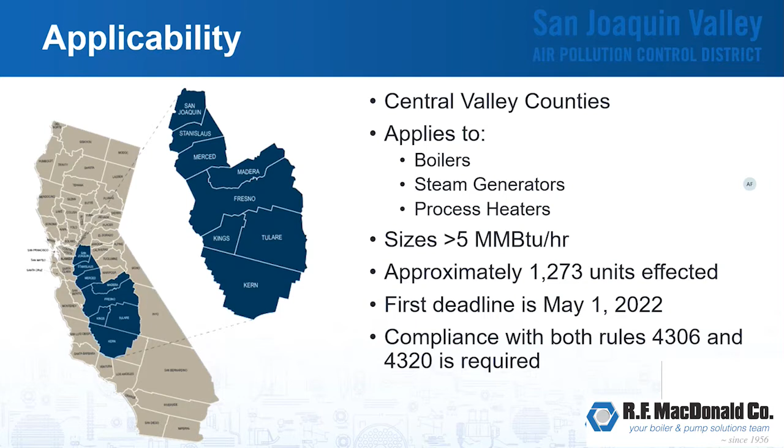Approximately 1,273 units are going to be affected. The first deadline for these rules, which we're going to talk about a number of times through these presentations, is May 1st, 2022. Compliance to both these rules is going to be required, rules 4306 and 4320.

We've got a team of people that'll be able to help navigate through those rules. For what we want to go over: a little review of NOx formation, the two NOx reduction strategies that we touched on previously, and then we'll get into more specifics on our SCR applications and the various ammonia sources we can work with. At the end, we'll have a question and answer if there's anything anybody wants to go over.

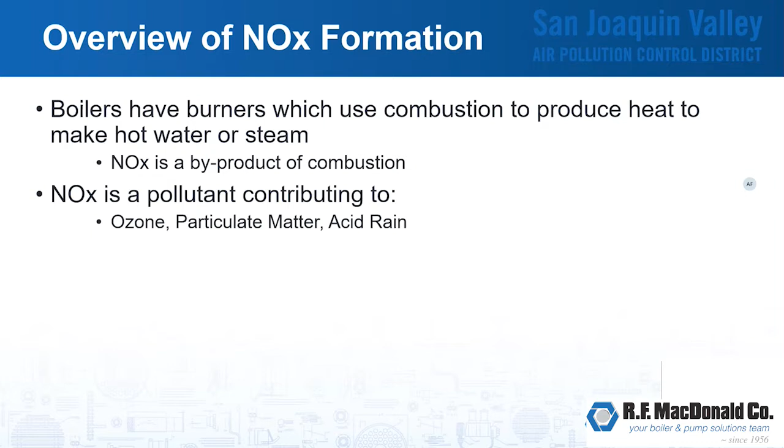Boilers and burners that use combustion to make heat are going to have products of combustion, primarily NOx. NOx is going to be a contributing factor to ozone depletion, particulate matter, and acid rain.

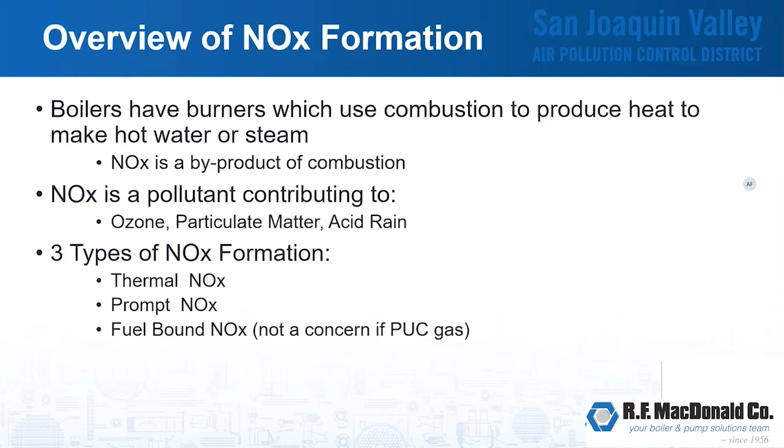The three main sources of NOx formation during the combustion process are thermal NOx, where we're creating NOx in high heat locations, prompt NOx, where we're creating NOx in fuel-rich locations within the flame, and fuel-bound NOx, where our fuel in and of itself carries additional nitrogen to promote the production of NOx.

Thermal NOx is the largest contributor to the overall NOx you're going to see. For ideal combustion, we're taking fuel, mixing free oxygen, free nitrogen that's in the air, and creating CO2, H2O, free nitrogen, and free oxygen, and the resulting is the heat that we use to heat our process.

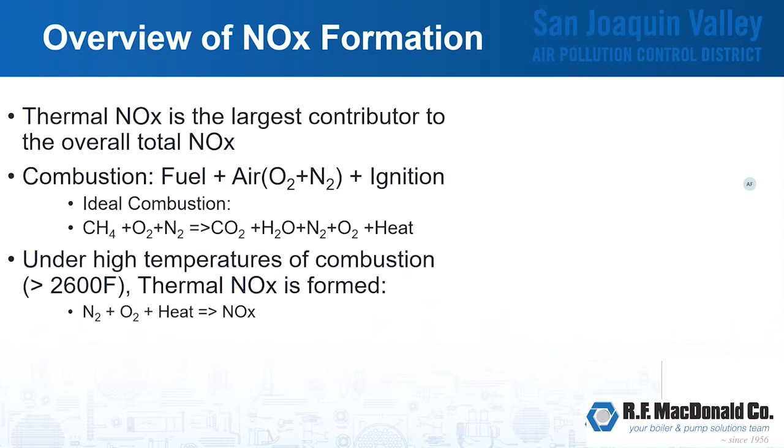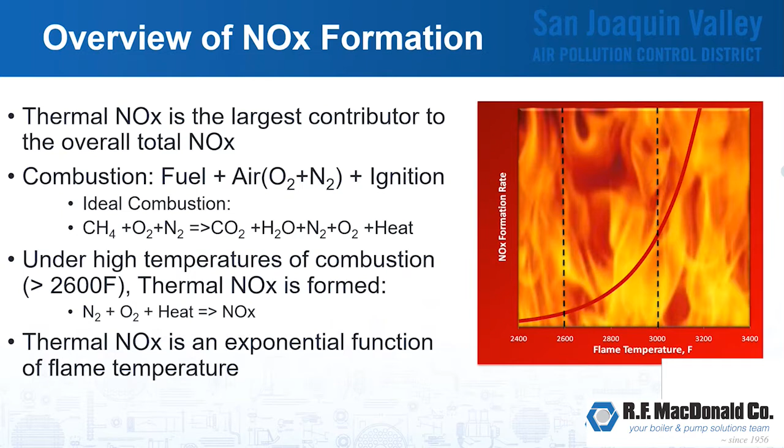Under high temperatures, free nitrogen and oxygen with that heat create NOx. And as we can see here in the chart, as we increase flame temperature, our NOx production is exponential. So the whole idea behind a lot of our burner technology is to keep that temperature down.

So the two strategies that we have: one is burner modifications or new burner. With this technology, we're able to get down to 5 ppm. Typically less expensive than exhaust treatments like SCR. For units smaller than 20 million BTUs, it makes a lot more sense to go with a burner modification or retrofit. One of the downsides to burner technology only is that to get there, we have to increase air, which decreases our efficiencies.

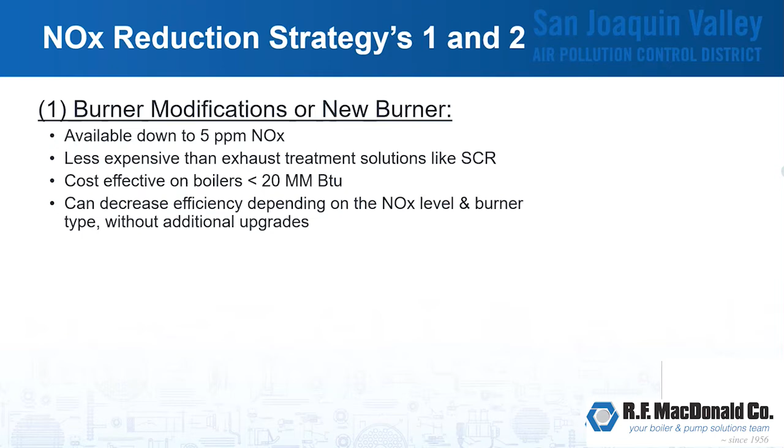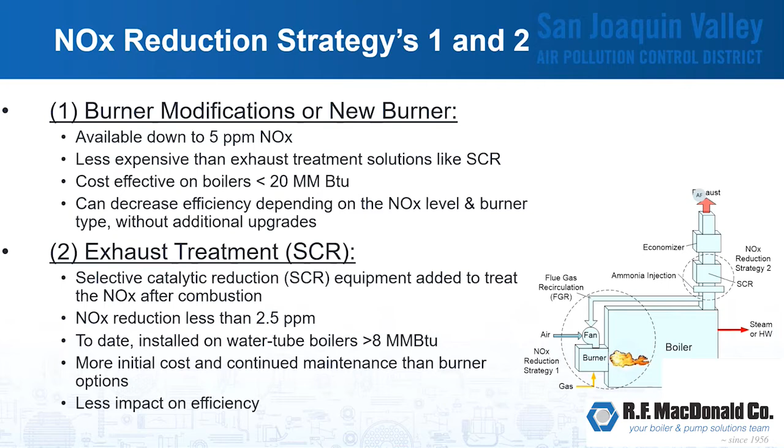The second option that we have is an exhaust treatment on the back end, which is our SCR. Our NOx reductions can get down to 2.5 ppm. To date, we've got them down on the smallest unit of 8 million BTUs due to special fuels that they're firing. Typically on the SCRs, you're going to have more of an initial cost and continued maintenance than you would have on a burner option. But one of the benefits to an SCR is that you're going to have less impact on efficiency.

SCR can be applied to most boilers, steam generators, and process heaters. It's been used for a long time. We've got a history going back to 2006, and it's a proven technology.

With SCR, we can meet air district regulations down to 2.5 ppm using an existing 30 ppm burner. And we can also achieve the lowest required ammonia slip of 5 ppm. There are different areas that may require 10 or 5, but 5 is the lowest that you'll see.

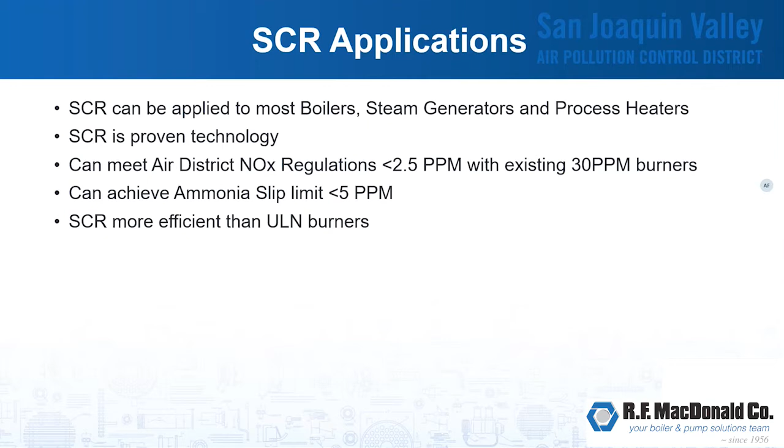SCR also allows for more efficient operation versus ultra low NOx burners. And reasons for that is we're able to reduce the fan horsepower on the FD fan, roughly 30%, though it varies by application. In general, we can achieve a lower burner turn down for better load matching and reduce cycling.

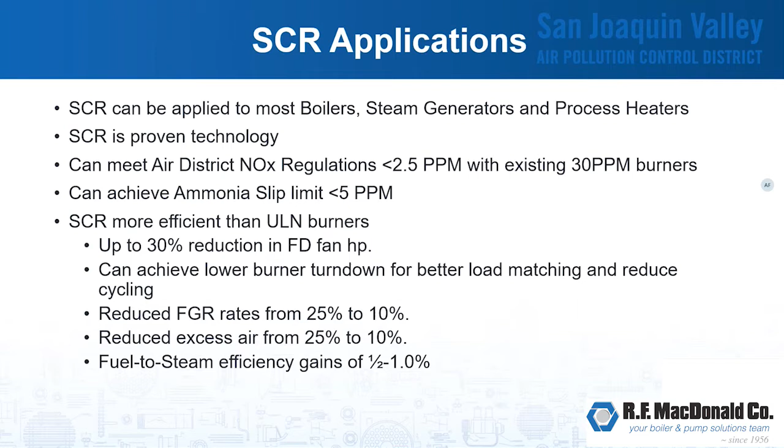We're also able to reduce FGR rates since we don't have to have the ultra low NOx FGR rates. Same thing with the excess air, we're reducing the amount needed for operation. And in general, it can raise your fuel to steam efficiency about 0.5% to 1%, depending on what your existing conditions are.

The NOx removal process is a selective catalytic reduction of nitrogen oxide. We're going to convert NOx in the combustion flue gas into harmless nitrogen and water without forming any secondary pollutants.

Ammonia is used to help make this process happen. It's mixed thoroughly with the flue gas by means of an injection grid, and it could be with or without static mixers to get an even distribution to the catalyst face.

Below is a little illustration of how that operates, where we'd be looking at NOx and O2 passing into our ammonia injection grid. There we'd have our mixing hitting the catalyst, and on the outlet, we'd be looking at water, nitrogen, and oxygen.

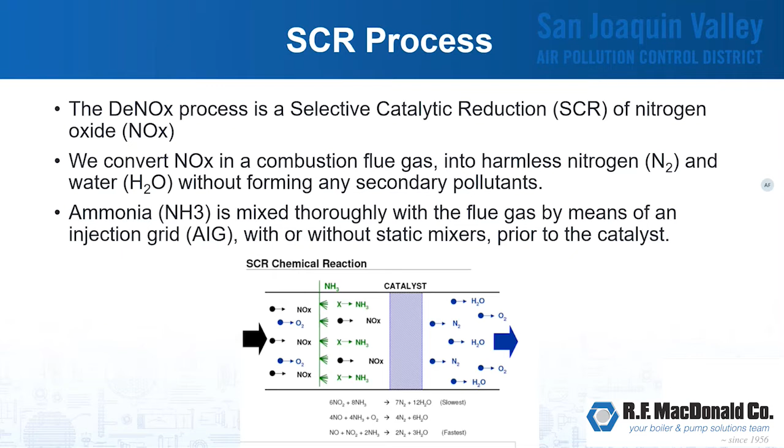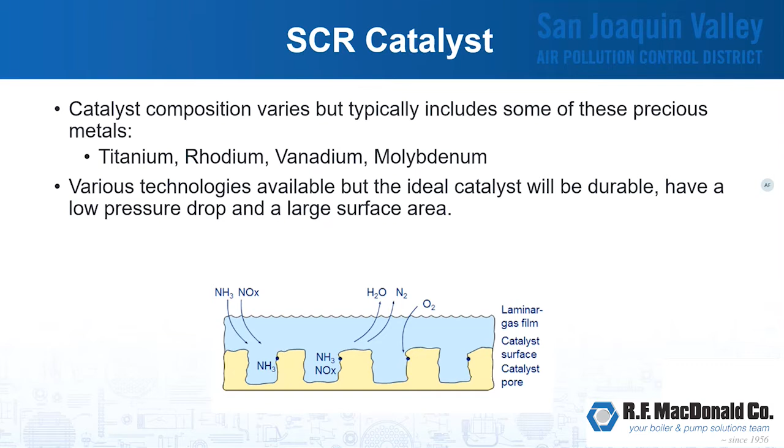Our catalysts are made of several precious metals: titanium, rhodium, vanadium, molybdenum, and there are various technologies out there. The ideal catalyst for your system would be durable, have a low pressure drop, and have a large surface area. The ammonia is coated within that surface area, and that laminar barrier is what allows this reaction to happen with the catalyst.

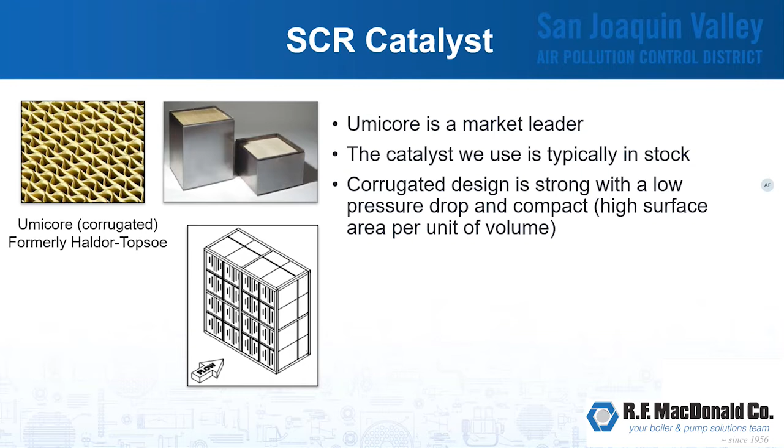For the catalyst we use, Umicore is a market leader and our primary source. It's typically in stock, so in a pinch it's readily available. It's a corrugated design, strong with low pressure drop, and very compact, meaning it has a high surface area per unit of volume.

We can design these for vertical or horizontal installations and have them installed as individual cassettes, or for some of the larger assemblies for horizontal flow, we can get them prefabricated and dropped in to help ease the installation process.

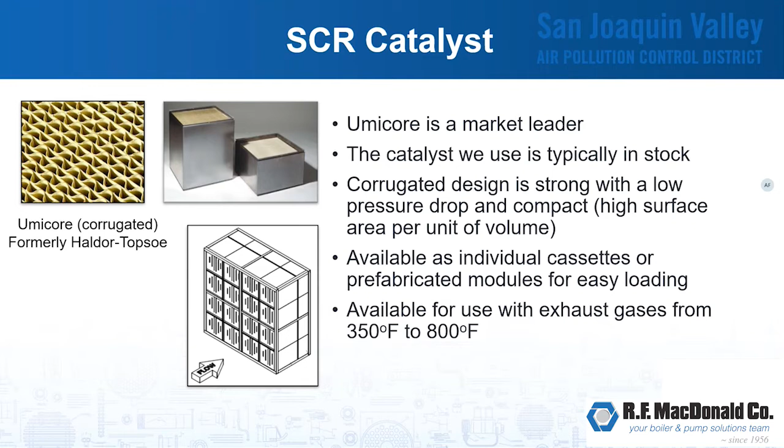In general, these catalysts are available for flue gas exit temperatures of 350 to 800 degrees. If your operation is outside of that range, there are means to augment the flue gas temperatures to get it into the range we need, so there are options there still.

For ammonia injection, it's very important to provide uniform distribution of ammonia in the gas stream to make sure all of the catalyst is utilized.

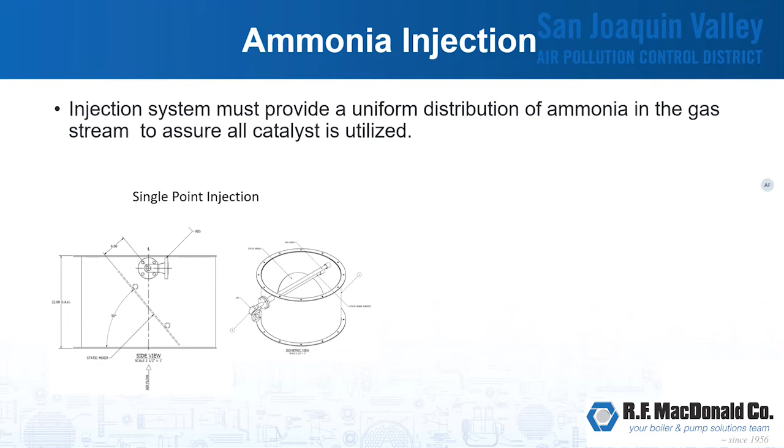One way we do that is with single point injection, which is ideal for round ducts where we have enough length to get the mixing we need before we reach the catalyst face. What makes this convenient is there's no balancing needed; we'd be able to get everything justified through flow modeling.

Or for larger profiles or square ducts, we would look at multi-zone injection, where we'd have several lances, each with their own balancing valve to balance things out when it gets down to the catalyst face. These are sometimes used with and without static mixers as well.

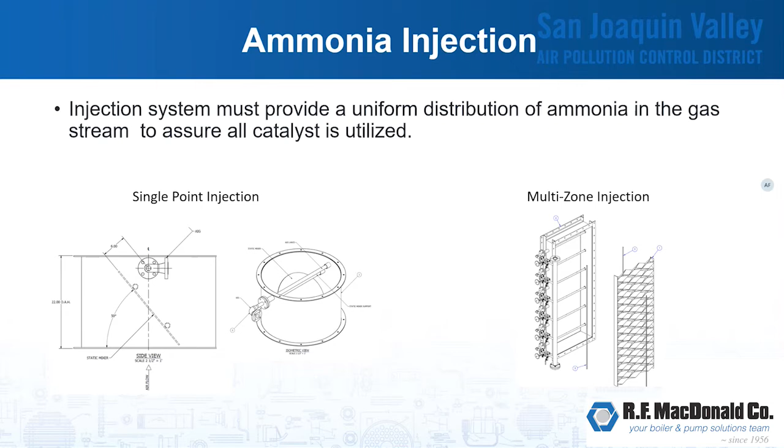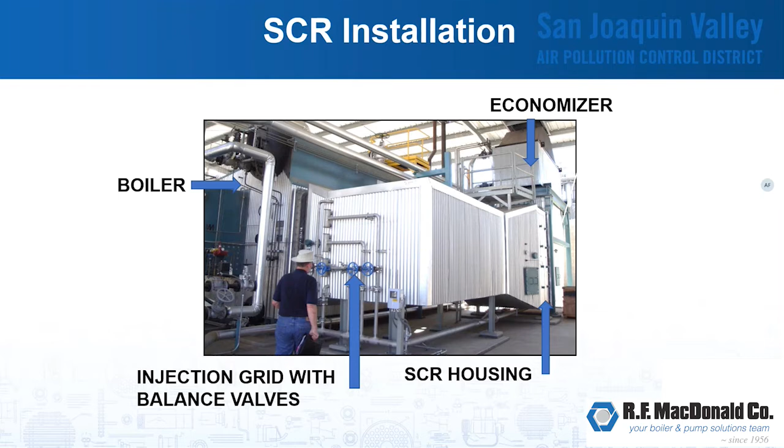As far as ammonia sources to make these reactions happen, one of the more common ones is anhydrous ammonia.

For anhydrous ammonia, our preferred grade is 4, considered refrigerant grade. That would be 99.995% pure ammonia with a 33 ppm limit on water.

The OSHA permissible limit for anhydrous ammonia is 25 ppm. This is in California. The immediately dangerous to life and health level is 300 ppm.

For storage of ammonia, typically we're providing these in smaller 150-pound cylinders. Most limits at sites are 500 pounds, so we were able to accomplish that with 3 units.

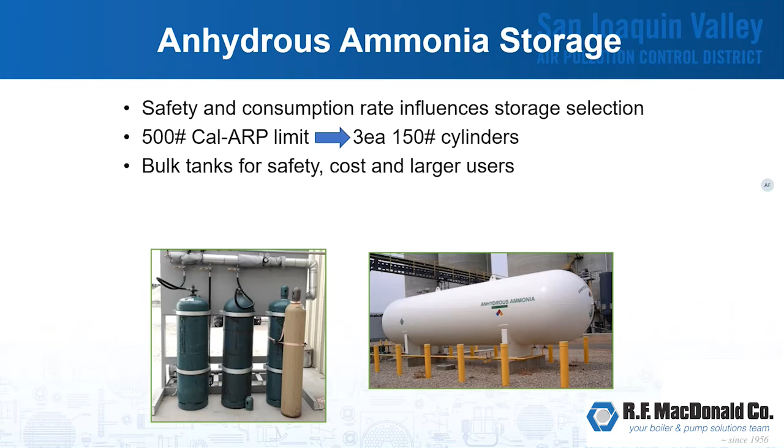For anhydrous ammonia, we include safety features like ambient ammonia leak detectors, relief valve discharge lines and pressure switches, airtight ammonia cylinders with cabinets and purge fans to minimize any exposure you could have, alarm horns and beacons, and water capture tanks for vents and relief valves.

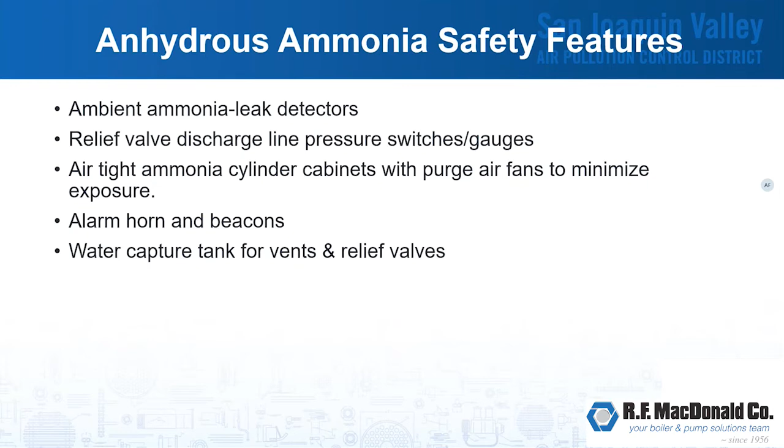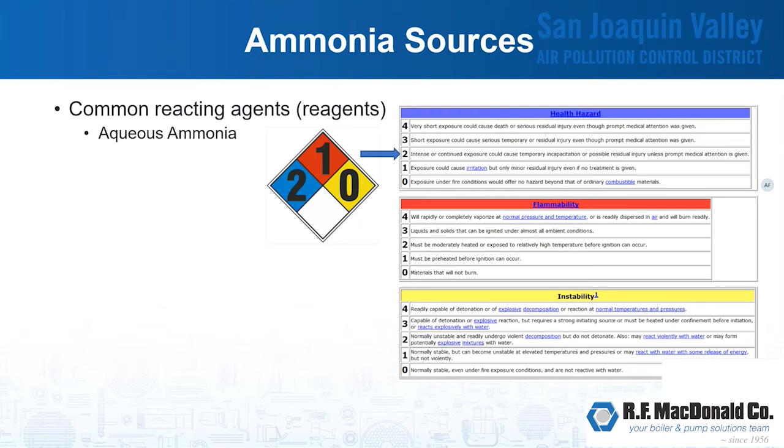Another common reacting agent is aqueous ammonia, which is ammonia in a liquid form. For this, the hazard rating is very similar, but we come down a little on the health rating to 2. So intense or continued exposure could cause temporary incapacitation or possible residual injury unless prompt medical attention is given.

For flammability, we're still the same, where it needs to be preheated before ignition. And stability is the same at 0, normally stable.

Aqueous ammonia is a solution of water and ammonia. With it comes lower risk and regulatory issues than if you're dealing with pure anhydrous ammonia. This solution is a strong base at a pH above 11.

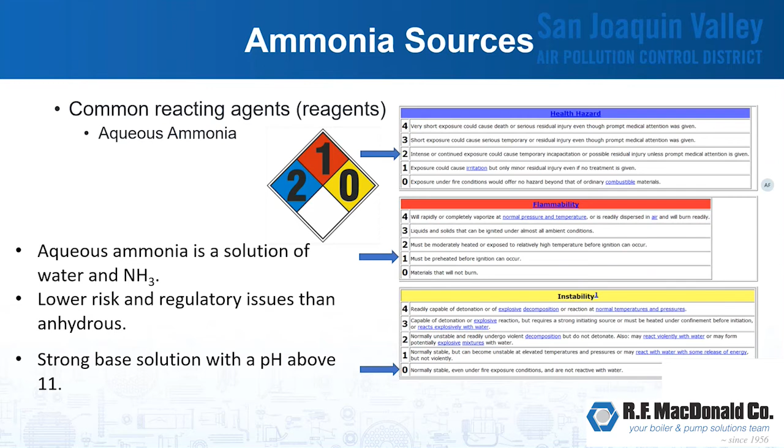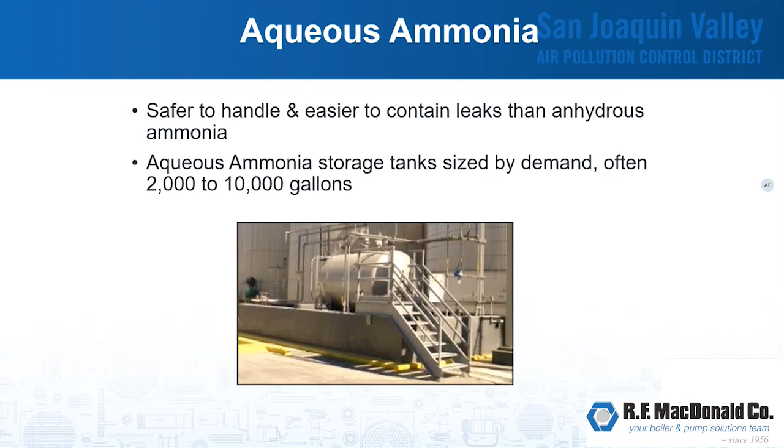For aqueous ammonia, it is safer and easier to handle and easier to contain leaks than anhydrous ammonia. Typical tank size could be anywhere from 2,000 to 10,000 gallons, but it's ultimately based on your demand.

Some of the safety features we have on aqueous ammonia systems are ammonia leak detectors, alarm horns and beacons. Bulk filled tanks can be filled by the aqueous ammonia supplier, keeping your personnel away from it. And the storage tends to incorporate secondary containment in case there is a leak.

For instability, we're also at 0, normally stable even under exposure conditions. Urea is classified as non-hazardous ammonia - ammonia is not present until the solution is treated and converted to ammonia on demand.

This reagent is similar to what's used on a lot of diesel trucks, commonly known as DEF, diesel exhaust fluid, and typically comes in purity of 32.5% with 67.5% deionized water. That's the most common, but there are various different levels of concentration.

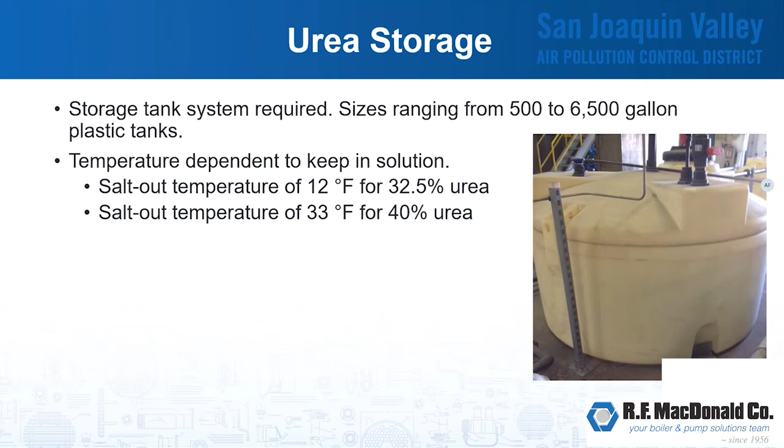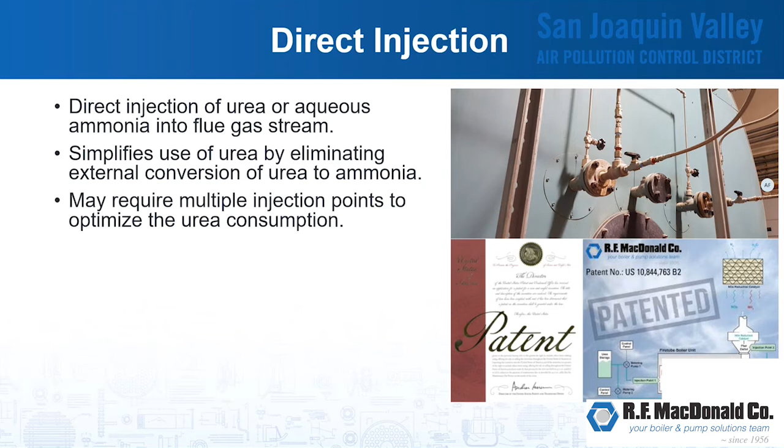Now for direct injection of urea or aqueous ammonia into the flue gas stream is something that we're able to do. It simplifies the use of urea by eliminating the external conversion of urea to ammonia. It could require multiple injection points to optimize urea consumption. This also lowers electrical consumption because you're not using electrical heaters to preheat air to get either vaporization of aqueous ammonia or conversion of urea to ammonia. With our injectors, we're using constant flow nozzles with DI water and urea added on demand.

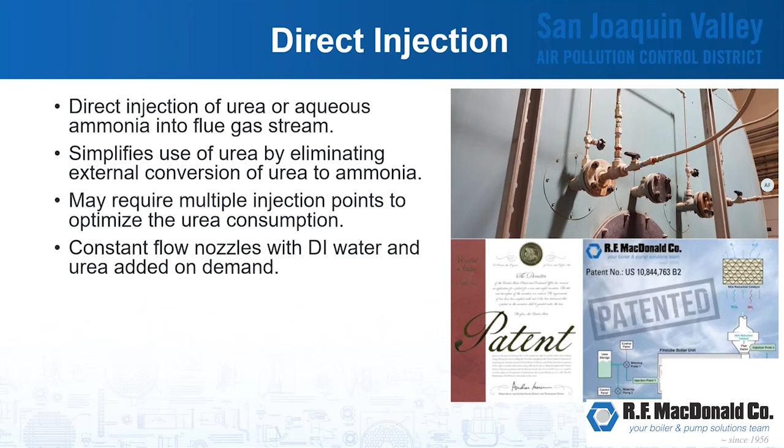Now for direct urea injection, R.F. MacDonald does hold a patent for this technology on boiler applications. That's something our team can review with you further if this is of interest.

For reagent distribution, liquid or gas injection is going to be controlled by PLC-based controls. Liquid systems include the pump and injection control, and these systems can be integrated into existing systems to allow for remote monitoring.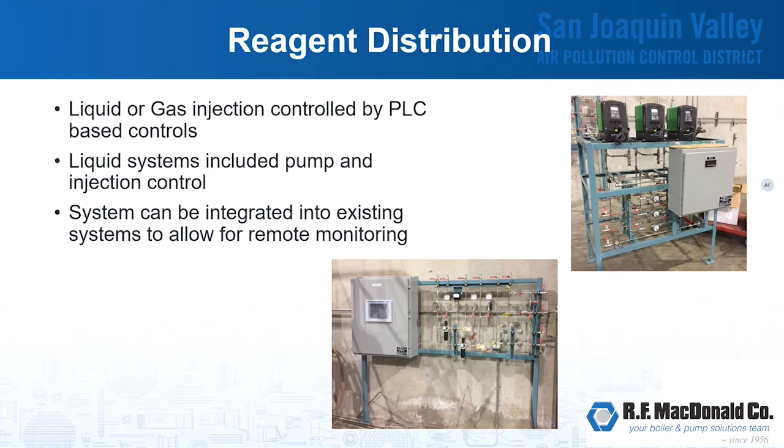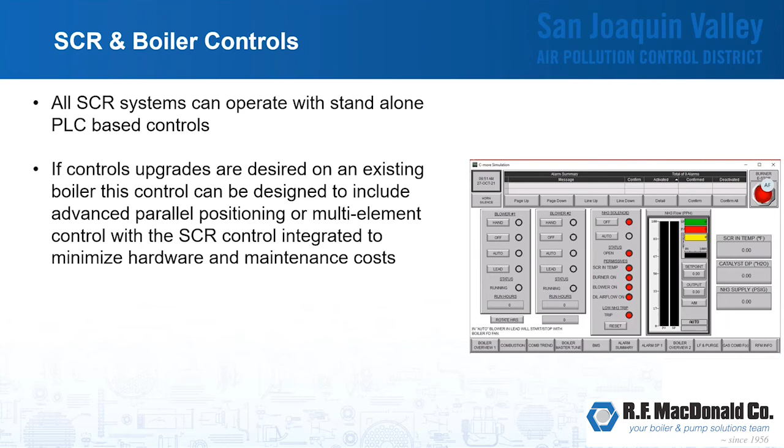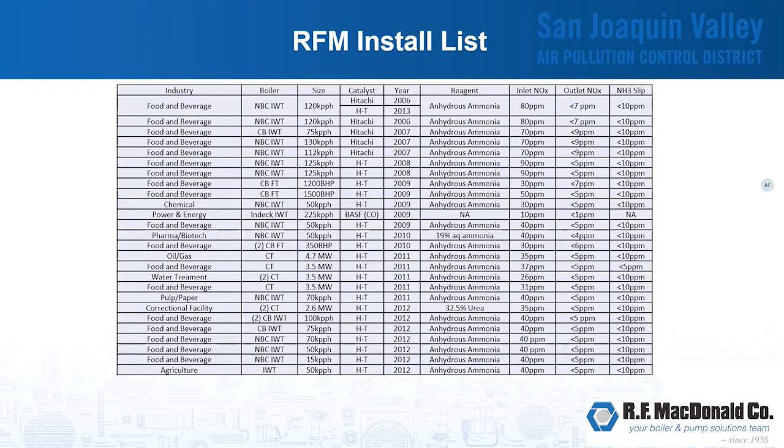For installations, we have several dating back to 2006, many in food and beverage, but spanning many different industries: hospital, oil and gas, universities, pulp and paper. We've got a lot of experience putting together systems for just about any application out there. With this list of projects we've done, we've got many more in design for supply in 2022.

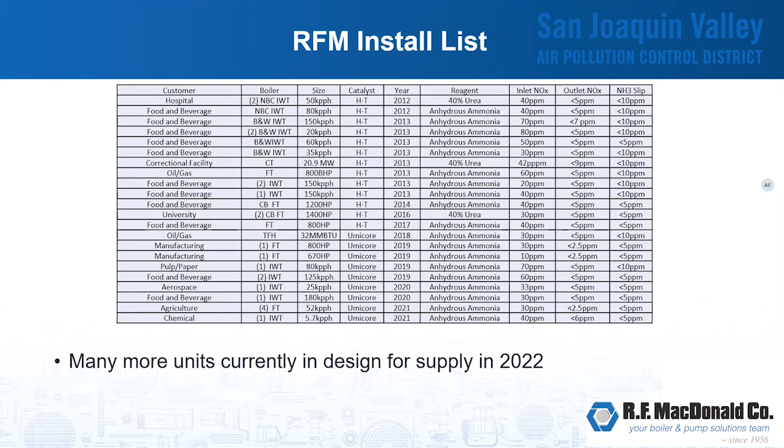So in summary, the selection of the appropriate emissions control system requires a detailed evaluation of environmental, technical, safety, and economic factors. Contact your local RFM representative to help guide you through this process to determine what makes the best sense for your conditions.

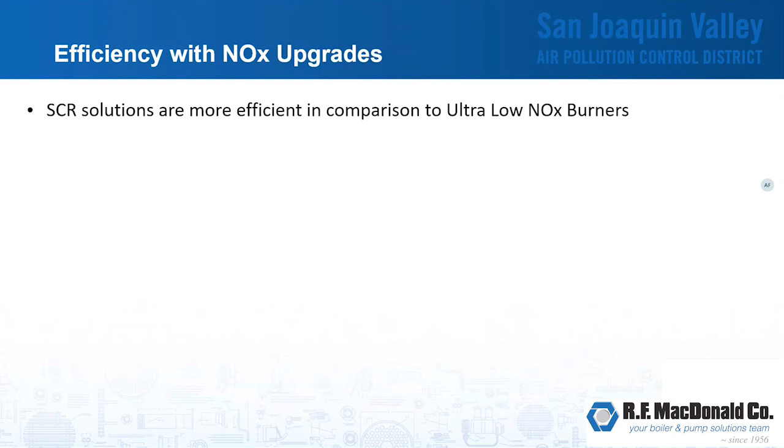Now, given that SCR solutions are more efficient in comparison to ultra low NOx burners, there could still be efficiency improvements available to lower your utility costs if the equipment does not currently exist in your plant. Some of the equipment would be single-stage economizers, two-stage economizers, blow-down heat recovery, and VFD-controlled blower motors. Depending on your current conditions, efficiency gains can be anywhere from 1 to 5%.

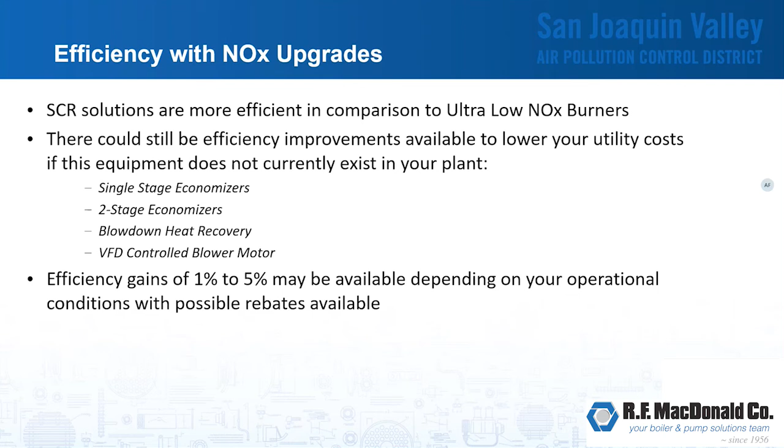But it's something we'd really need to take a look at, and we can calculate what that return on investment would be.

So in general, when we're taking a look at the different options you have, we realize every customer is different. We can help evaluate site-specific conditions and propose customized options to what it is you need.

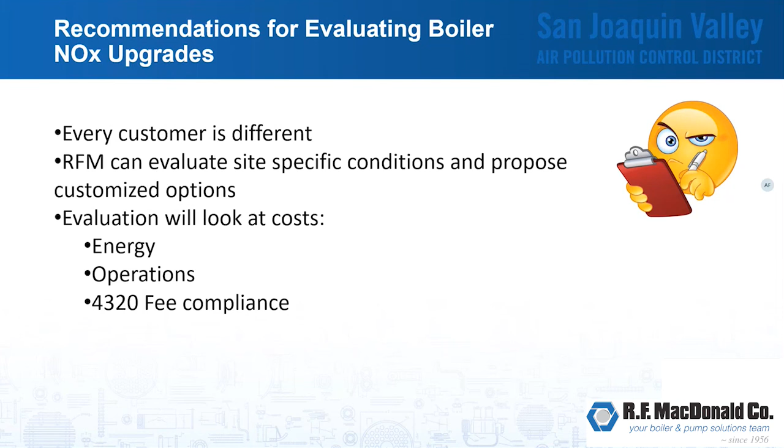Our evaluations are going to be looking at costs for energy consumption, operations, as well as considerations for 4320 fee compliance. And we can give competitive analysis to make sure that you're making the most of your investment.

Now, for the timeline for the rule changes that are going to be occurring, one of the first milestones we've been talking about is May 1st, 2022. On this date, 4306 non-deferred units and 4320 users everyone needs to submit an emissions control plan or authority to construct to the district.

On December 31st, 2023, 4306 non-deferred units and 4320 users need to come into compliance.

January 1st, 2025, this is the start for when invoices will be issued for users paying the fee of 4320, and it'll be issued for operations in 2024.

May 1st, 2028 is when 4306 deferred units have to submit their emissions control plan and authority to construct to the district. And ultimately, December 31st, 2029 is when all 4306 deferred units would need to come into compliance.